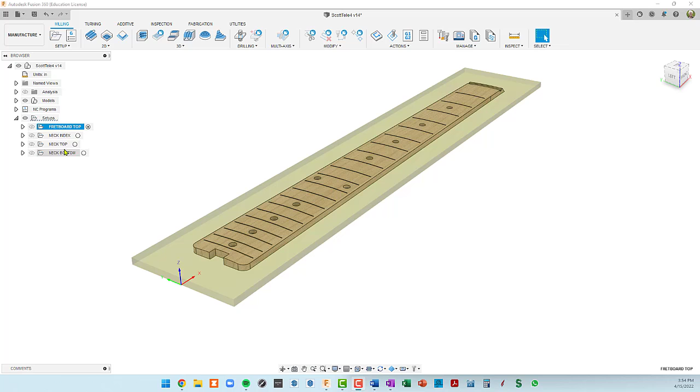So we're starting in the manufacture workspace. And in the last episode, we did this fretboard top tool pathing. I've added 3 more setups here, and let's review those new setups. So if I click here, I'm activating the setup. This is showing basically just a piece of stock with 2 index holes that are centered in the stock and 1 inch in from each side. So that's its own setup, basically just to drill these index holes.

Then we get into 2 more complicated setups where we're finishing off the headstock portion of the neck and doing the truss rod. And I believe I did the tuner holes on this side as well. And then we're going to do the neck bottom, which is going to finish this curvature part of the neck and the transitions to the headstock and heel. So pretty straightforward. Let's start with the index setup. So if I double click on that, we're going to edit it. And I'll basically go over the setup here.

So my stock box point in all of these setups is going to be the same. It's going to be the top of the stock and this point closest to me on my CNC. My long axis on my CNC is X and the short axis is Y. So I've configured my work coordinate system to match that. And what we're modeling here is basically just a piece of stock.

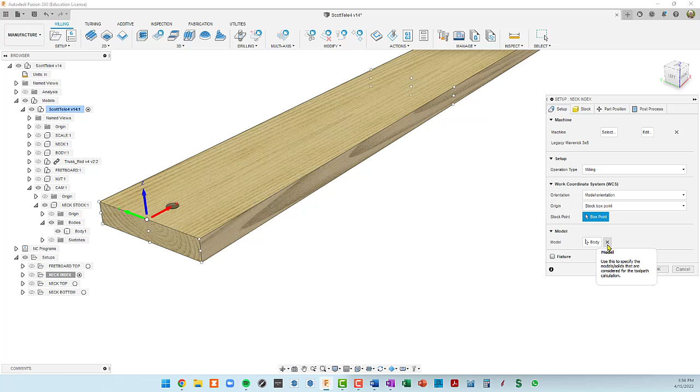So what I did was I went into my model, and here's a copy of the model, and I made a CAM component. And inside that CAM component, I made a neck stock component, and basically just made a 30 by 4 by 3/4 inch block, and that's this body right here. So when I'm selecting a model, what I'm modeling in this setup is just that piece of stock.

And so if we go back to the design side, I can show you. If we activate our CAM, I'm going to activate the neck. I think I've got another sketch on right here, which is probably the scale, so I'm going to hide that. And basically all I did was I made a sketch inside here to put these 2 holes in.

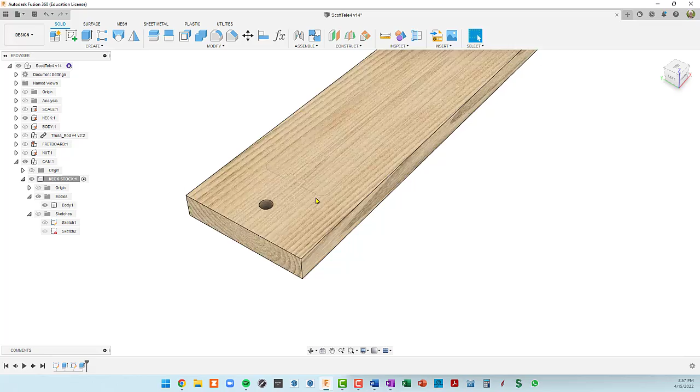So the holes are 3/8 of an inch because I use 3/8 of an inch wooden dowels, and I use a 1/4 inch bit to bore these out. So since this is a 4-inch wide piece of stock, all I did was I came in 2 inches with a dimension here and 1 inch from the end and my 3/8 inch hole, and then extruded that from the sketch, and that's basically what we're using for the stock.

So when we go back into the manufacturing side, in this neck index setup, you'll see that what I picked here was this body, which is inside my neck stock component, and that's going to be what we're going to model in this very quick setup. The stock here, I'm actually using the same body for the stock. So I pick from solid, which means you're actually picking it out of the model, and then I pick this same body. So you can see here it's 30 inches long, it's 4 inches wide, and it's 3/4 of an inch thick.

Okay, so let me collapse this model down. All we need to do within this setup is a single toolpath. So let's go ahead and look at this toolpath. This is a boring toolpath. I set my feed rate to 40 inches a minute, which I think is plenty. It's a 3/8 inch hole, so I need a bit smaller than that. So I'm using a 1/4 inch flat end mill.

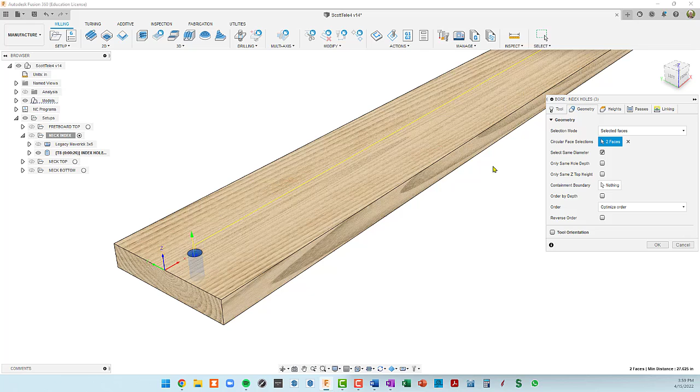The geometry selection, if I turn this off and I can reselect it, I'm just selecting the faces of this hole, like so. So you see the two faces here. This is kind of cool here too. If I only selected a single face right here, then I can turn on this check mark right here, and it says select same diameter.

It's going to automatically select the same diameter holes. So I've got a single face selected, but it looks for other holes of the same size. So if you had a bunch of holes, that's a nice little time saver.

So the heights, basically our top height, which is our cutting height, is going to be the top of the stock. The bottom height, which is the bottom of the cut, is going to be the stock bottom. But I want to go a little bit farther, so I went negative 5 thousandths. So this blue bottom goes a tiny bit beyond our stock, cutting into the spoil board a little bit, purposely, so that we cut all the way through it.

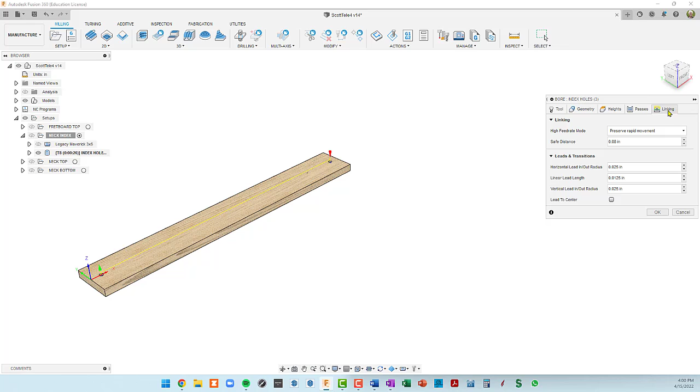Passes, I don't think I did anything here in the passes, and I didn't do anything in linking. So let's do an OK, and then we will simulate this toolpath, and it's probably on pretty fast here. Let me slow it down a little bit.

Okay, so now you can see it boring down through this hole. And if we get a side view right here, you should be able to see the tool extend just a tiny bit beyond the stock. I'll pick up the pace here a little bit.

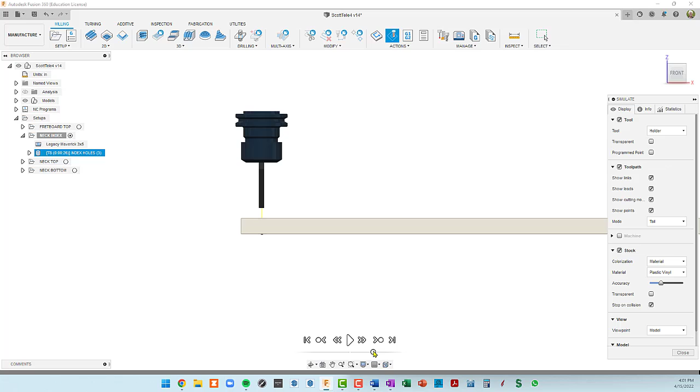Let's let it go to the other side. I'll pick up the pace a little bit. Here's the other hole. And yeah, it did actually bore a little bit through. That's the remainder of the tool path, the tail of the tool path going through the stock. So that's it. That's all that's in the first setup.

So now that the stock has these two holes drilled in it, I would position this on a separate spoil board, just a piece of MDF that also has the exact same two holes, and then put my wooden dowels in. This is going to fix this position on the CNC, and when we flip it, it'll also be perfectly centered. That's why with these center holes, we want to use a work coordinate system that is centered on the stock.

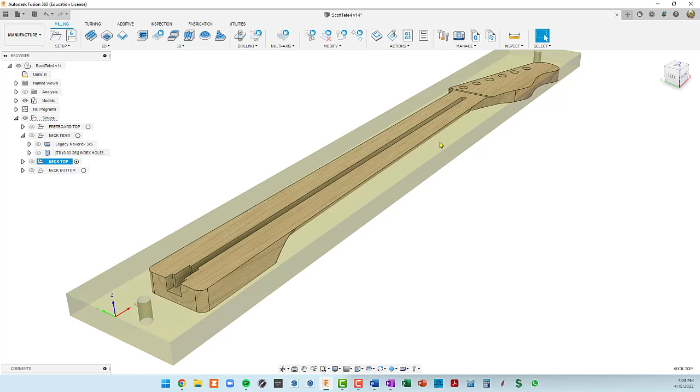Okay, so I'm going to go to the next setup, which is the neck top. I'm going to activate that setup and hide the index hole toolpath. You can see that we're using the same work coordinate system, so we're going to touch off the top of the stock for our Z. You can also see our dowels in the stock and the neck model inside the stock. So let's go ahead and open this up, and you can see there's 3, 4, 5, 6 different toolpaths in here.

I'm going to go ahead and simulate all the toolpaths, which I can do by selecting the setup and then going to simulate. I'm going to go to comparison here instead of material. In comparison, any green surface is finished, any blue surface has remaining stock, and anything in red we've overcut. In this case, you can see the headstock is buried somewhere inside the stock.

But the top of the neck, where the fretboard would be glued on, has not been... it is already finished because we're starting with a 3/4 inch piece of stock, but the truss rod slot has to be cut.

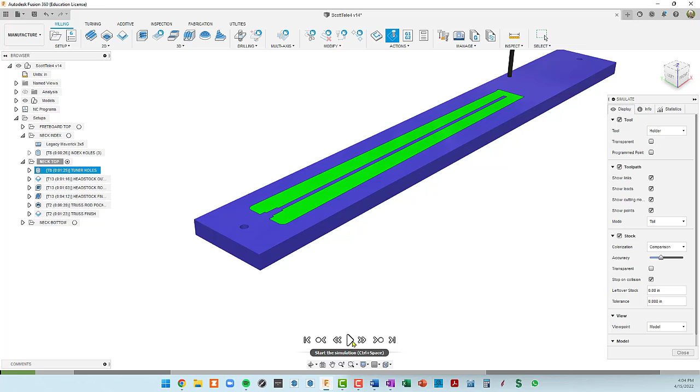Okay, so let's go ahead, and I think looks like the first operation are the tuner holes. So that's going all the way down through.

Now this is an outline of the headstock, which is basically just cut down to where we're going to reduce this headstock down to. Then a roughing operation, which is cutting out just the headstock material almost down to where it should be, but leaving a little bit so we can get it in a finished toolpath. This roughing operation is also going to show a step up, a transition to the top of the neck. Right here you can see the steps coming in.

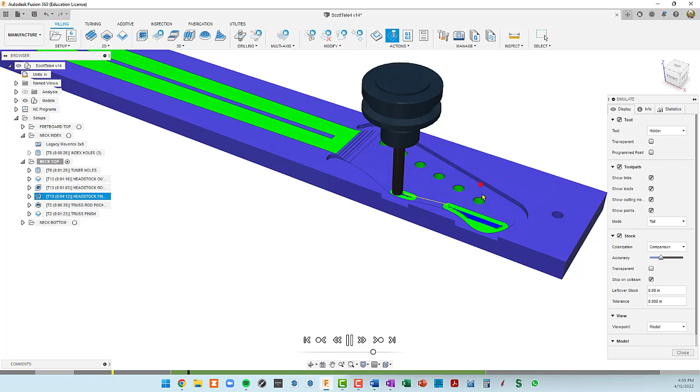Now it's going to the next toolpath, which is actually a parallel finishing toolpath with a ball nose. And now it is finishing. I'm not sure, that actually isn't a ball nose, but I'll go into why we can get away using a flat end mill here when we analyze that toolpath. But you can see it's now doing the transition step up to the top of the neck.

Notice it's not dipping down to the tuner holes, and there's a little trick to prevent that, which I'll go over. Let's pick up speed a little bit here.

Finish the smoothing operation on the headstock. And now with a smaller bit, I should slow this down a little bit.

Very quickly doing our truss rod slot. There's actually two operations here: we're doing a truss rod pocket operation and then a finishing operation using a contour. I'll go into why there appear to be two duplicate toolpaths here.

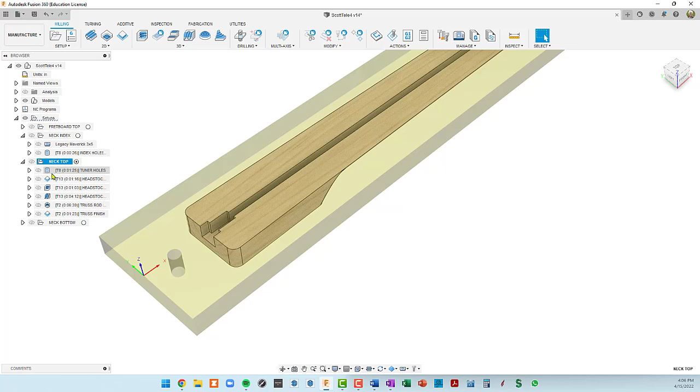Okay, let's start by analyzing our first toolpath, which is the tuner holes. This is pretty simple - it's going to be a boring toolpath, a 2D bore. Basically all we have to do is pick these holes.

Now it looks like we don't have any holes here, and actually that's the trick I used so that when we're finishing the top of the headstock, the tool will not dip down into these holes. I actually patched these surfaces and they're separate bodies. So I'm going to go into the model, and in the neck, if I open that up, we've got some extra bodies here that are all surface bodies. For the time being, I'm going to hide those six, and now our tuner holes open back up again.

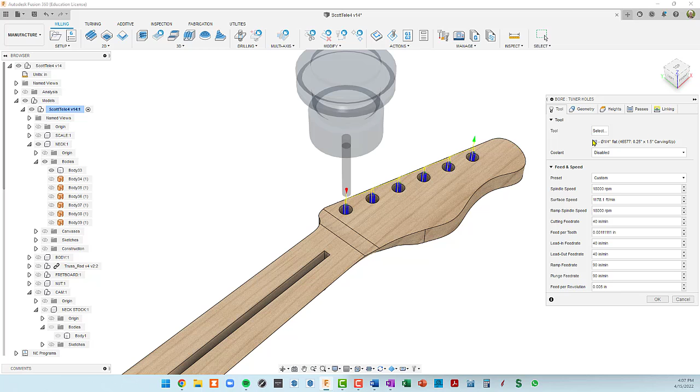So backing up here, our selection of a tool was a 1/4 inch flat end mill to fit inside this hole. I think it's a 10mm hole - let me check it. See what that is. That is 0.394, which I think is 10mm.

The visibility came back here of our patched hole tops, so I'm going to hide that again. Okay, back in our toolpaths, going back to our tuner holes. You can see the boring operation is spiraling down into the hole. I've got a 1/4 inch bit here, and a 40 inch per minute cutting rate.

If we go to the geometry, remember this select same diameter - basically all you have to do is select one face, turn this on, and all 6 of them are selected. Okay, so if we go to our heights, I've actually got the stock top selected for our height. Now you might think, well, why don't we just select this reduced surface on our headstock? That hasn't been cut yet.

So we literally do want our stock top to start our cut, the top height. And then the bottom is the stock bottom, and we went beyond 5 thousandths - same thing we did when cutting the index holes, just to make sure we get a clean cut on the back side.

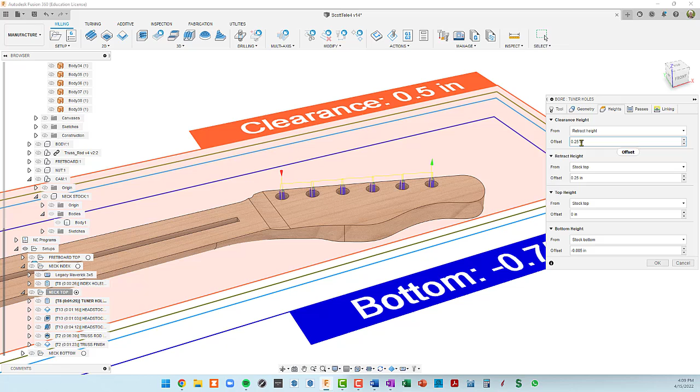Okay, let's see, our clearance height. Looks like there's an issue here. Let's see if I do an okay. Yeah, okay - clearance height, feed height reference. Let's just set this - I don't know how this got changed, but I'm going to set this to retract height, an offset of 1/4 inch, which is what it normally is.

Okay, passes - I didn't do anything in this boring operation. And so that's it, you can see the tool path spiraling down there. Let's go ahead and simulate that.

It's probably going a little fast here, but we can see the last two. And if we turn this on its side and play that again, we should be able to see the bit go just a little bit through, which we're seeing. Okay, so I'm going to close that.

So once that's done, we should see green in those holes. And I think we did - let me just confirm that. We'll run this simulation one more time.

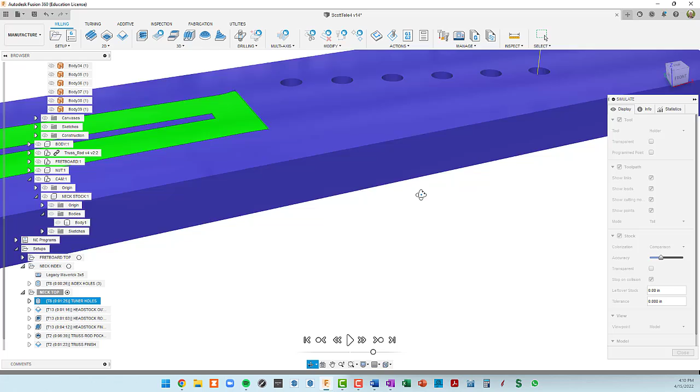So we're seeing something interesting here. We're seeing green inside the hole a little bit down, but this blue ring here is going to get cut out when we reduce the depth of the headstock. So that's why it's showing blue and green. If we looked at it from below, we'd see these green holes. Okay, so that's our first toolpath on the neck top.

Let's go to the second one, and this is a headstock roughing. By the way, if you don't see everything that's in this browser, you can just pull this sideways until nothing's getting truncated here. So this is my headstock outline - this is not the roughing. Let's simulate that alone and then go ahead and analyze it.

So here's the simulation. It's taking a 3/8 inch flat end mill and cutting around the profile of the headstock, but it's still leaving some material on the sides, so it's not doing the finished cut here. The purpose of this is to give the next toolpath room to operate when it reduces this headstock top down, so that it won't collide with our stock when it gets towards the edge.

So, pretty simple toolpath - let's look at that. Double click to edit it. So we're using a 3/8 inch flat end mill. This is at 80 inches per minute. So let's take a look at the geometry - basically we want to cut around the perimeter of this headstock and stop before we start with the neck.

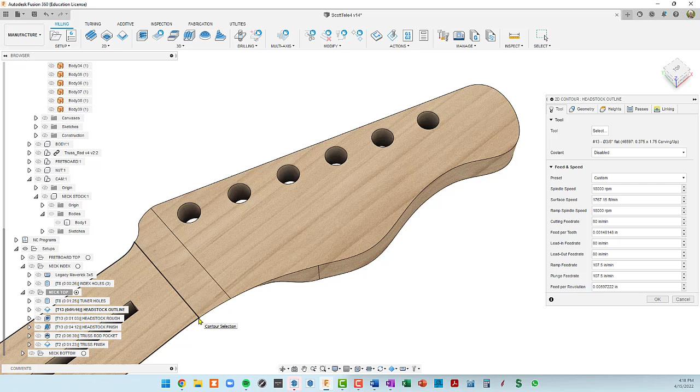So if we look at geometry, you can see that it's an open contour. It goes around and stops right here at the start of the flat portion of the neck. Okay, let's see how that was selected.

We want selected contours here. I'm going to delete the chain. Now if I just click here, that's a good start. If I click here, it's going around the whole neck, which is not what I want. So I'm going to delete that chain.

So what I did was I clicked here, and then alt-clicked on it. And you get this little thing where you can kind of build your own contour. We want an open contour, so that's selected.

Now I want to click on all of these sections that I want a continuous contour for. You can see they turn a light blue, a little bit difficult to see, but let me try to select that one again. Okay, that's selected, and that's selected.

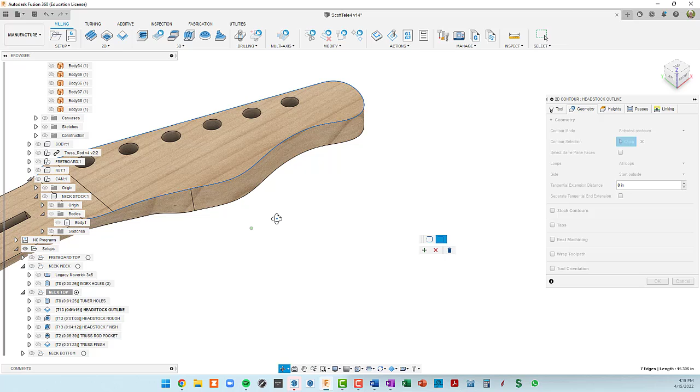So now that all of those continuous contours are selected, and keep in mind it's open because we don't want the bit to come across and slice our neck up, I'm going to press this plus button, which accepts the contour. Now you can see that it matches the one that I deleted previously. Our line is on the outside boundary, so that's good.

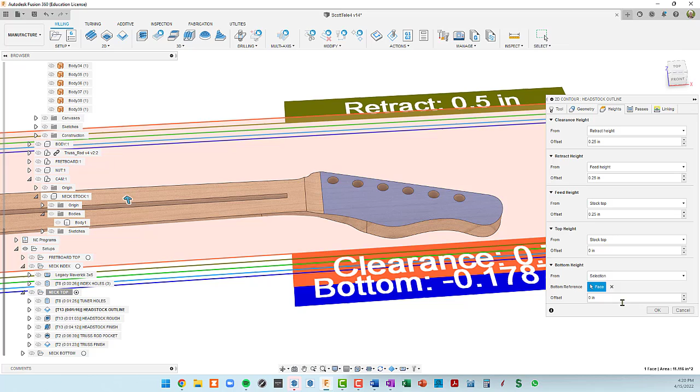So now let's look at our heights. Basically the bottom of this cutaway in the headstock is where I want to take that outside contour down to. So we're starting at stock top and going down to a selection, and the selection is this face. Now since this is a roughing pass, let's see, did I leave any extra?

I did leave 20 thousandths radially on the walls, basically. Let's just go ahead and do an OK and see what that toolpath does.

Since this is a contour, this is cutting with the full width of this bit. I mean, it's a 3/8 inch bit, but still I don't want to cut more than half the diameter of that bit in any one pass. So you can see there was a couple passes there. Let's go in and take a look at that toolpath and see how that was done.

I just did multiple depths here, and I set this to, I guess that is half of 3/8. So that's, I believe, 3/16, 0.1875.

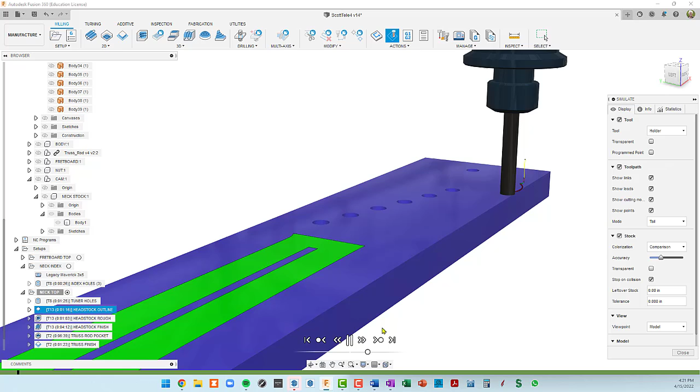So that's how the multiple depths was derived. And now that we look at the toolpath, we can see that we do have multiple depths here. And it's also ramping down. So let's play that again with that in mind. You can see the tool's getting a little deeper as it ramps down.

Stops right there near the side of the neck. Let me pick up speed a little bit here. And it's traveling in 2 directions, which is another check mark inside these dialog boxes.

Okay, so that's done. Basically, the reason for that is now we have kind of a safe area when we're hogging out all this material in the headstock, where the tool, when it gets to the edge, it's not going to collide with the stock.

So the next thing we're going to do is the actual roughing out of this area. Let's simulate that. You can kind of see what it's going to do is bore down and then in a circular motion do an adaptive clearing.

Let's play that a little fast here. You can see it's cutting with the side of the bit, which is an adaptive clearing. And it's leaving a little bit of stock for the finishing operation, but hogging out most of this headstock.

And then once it finishes, it's going to actually do this step-up transition to the neck right there. So that's the end of the roughing toolpath.

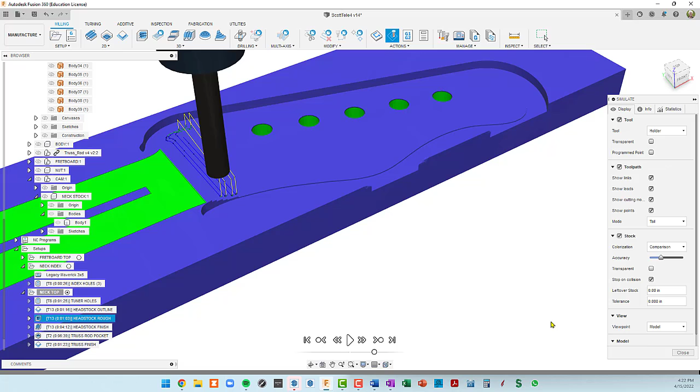So let's edit it, take a look at the settings in there. We're starting with a 3/8 inch flat end mill. The geometry is the same machining boundary, but it's a closed profile now.

So I did the same thing to make this, a very similar thing. Let me turn this off and do it again. So we're going to start with this. Just clicking here, even clicking here is not going to add, it's going to add too much to that machining boundary. So we're going to click here and then hold down Alt and click on the red toolpath.

This time we want a closed contour. So we've got a section of it selected. I'm going to click here. Did I get it? There it is. Right here, we're going to come across.

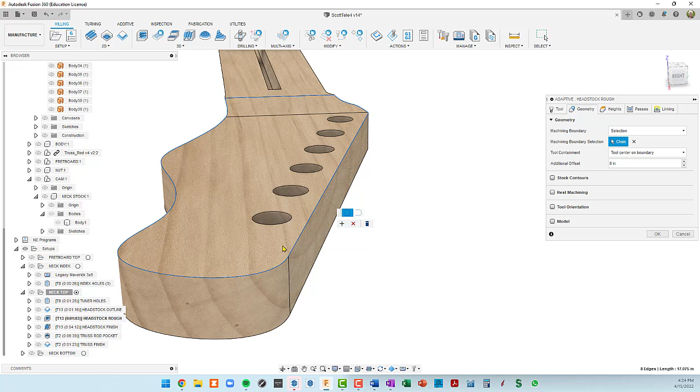And there should be, I think, 3 pieces here to get. Yep, got it. Very difficult to see this. I wish they would make this a little bit thicker, this blue selection. But I think we got it. So we're going to hit plus to accept it. And then you can see we've got this kind of greenish contour that basically defines exactly what we want to cut here. So I think that's all we need to do in geometry.

The heights. So we're going to cut from our stock top down to this selection, this face, the same way we did in the perimeter cut that we did previously. Now let's see, since this is a roughing operation, we do want to leave on the floor our axial stock to leave 20 thousandths. And that's basically all I did there.

Okay, so we'll simulate it one last time. So our 3/8" end mill is spiraling down, helixing down, then doing its side cutting, and you can see it has no problem going beyond the geometry because it's been cut away. And so that is our roughing operation.

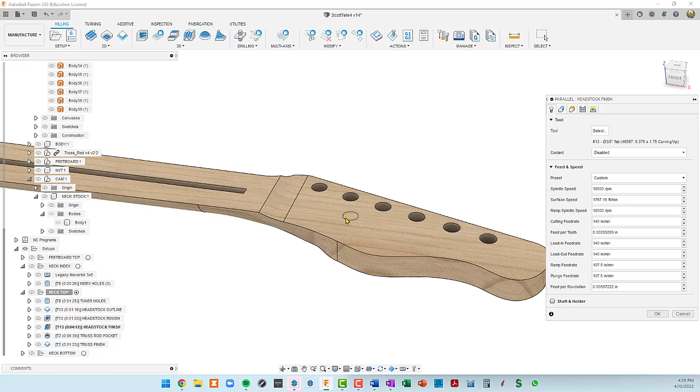Okay, so next up we're going to go to our finish headstock operation. Now, I originally said that this was a ball end mill, but it's actually an end mill. So we picked the same tool we've been using, this 3/8" flat. The reason we can get away with this on a finishing operation is we are going to use a parallel toolpath and step straight up on this transition. And when we do this, the end mill's sort of acting like a ball end. So with a straight parallel, and we're perpendicular to this line here, we can get away with that.

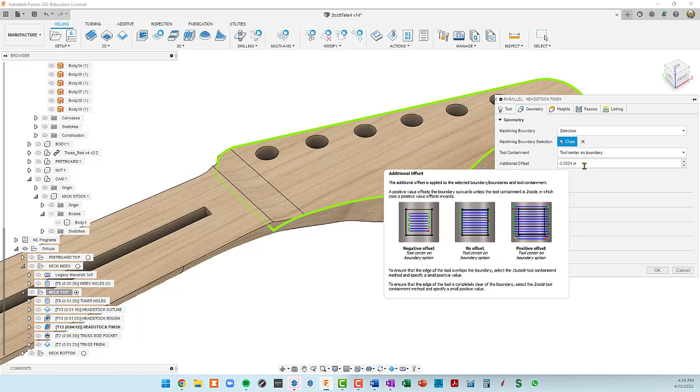So we've got our tool selected. Since this isn't cutting much, I'm going to go at 540 inches per minute on this finishing operation. Let me pull this out a little bit. Let's go to geometry. Same thing here. Selected the machining boundary. I'm not going to go into that again, but same as we did it in the roughing operation. Now, this is something that I learned in somebody else's video recently. This defaults to 0. Okay.

Now, I'm going to go ahead and show you the problem with this toolpath. And I didn't see the problem until I actually cut this yesterday, and the bit just dove straight down through this stock. You can see these two lines here. Very troubling. I think it actually moved the bit inside the collet a little bit too, and kind of screwed up the finishing of this top. So when I simulate this, watch this. So here's our finished toolpath. And you're going to see the problem here in a second, right over here in this area.

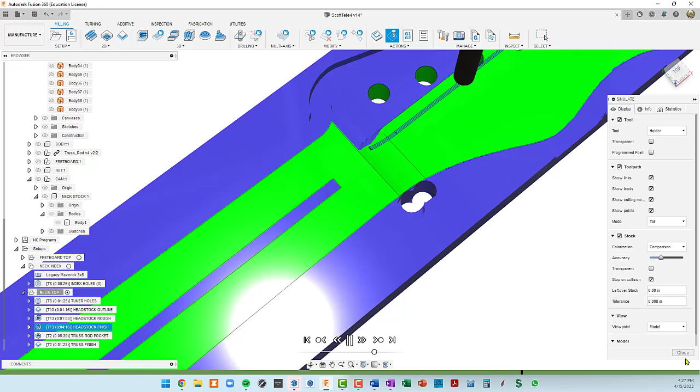You see the holes that it cut all the way through the stock, and it just plunged down there really quickly. And the other weird thing is Fusion's not reporting a collision with stock. That is certainly a rapid collision with stock. So it's as if Fusion didn't know that it was doing that on the toolpath. There is a fix for that, and I will show you that. So I'm not going to watch this finish. So we can see the problem right here. See how it's dipping just straight down through the entire stock.

Okay, so I don't totally understand this, but I can show you how to fix it. In passes, there is a setting called tolerance that's set to 0.4 thousandths, 0.0004 inches, tiny amount. Something about Fusion will translate the model into an STL model, which is like a triangular mesh type model. And this is the tolerance that it uses to do that. And I guess it gets screwed up sometimes, just creating extra crap on your toolpath.

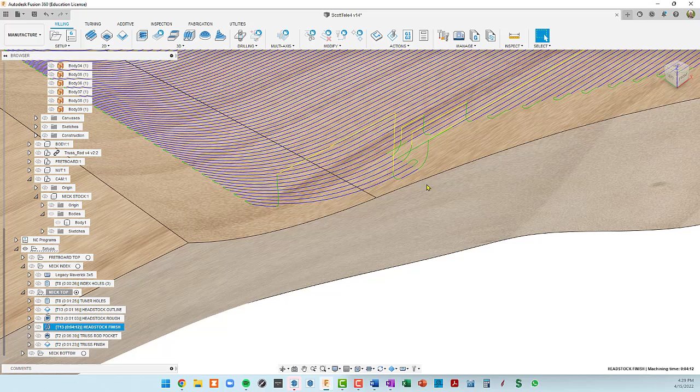So if you go into geometry and set this additional offset to the negative value of whatever this is, so if you put in negative 0.0004 right here, and let's go ahead and generate the toolpath again. Magically, that big dive down is gone. It's just eliminated. I don't know why Fusion doesn't do that automatically. You would think it would. But anyway, so that solves the problem.

Let's look at one other thing here. By default, this is probably turned off, this contact point boundary. So let's go ahead and show the toolpath without that. And let's see if this bit is getting up all the way onto the top of the neck with its transition here. So I'll speed it up a little bit. It actually is doing that.

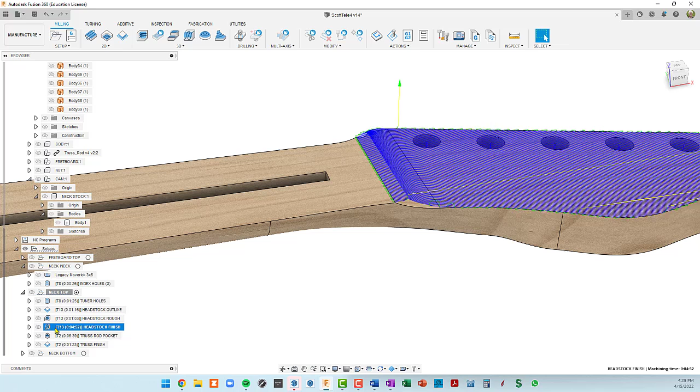So if this wasn't finished all the way up, generally this setting will fix that. You know what? I guess you don't need it with the flat end mill, but with a ball nose bit, you definitely would need this turned on. So I'm going to turn that off because I don't need it with this mill. Okay, so heights. Pretty much the same as what we did on the previous. We've got our stock top.

This is interesting. We really don't have to go from the stock top, but I think Fusion's kind of figuring out where to start here. And same thing with our model bottom. We're obviously not cutting to the model bottom, but Fusion's doing the right thing. Passes: we don't need multiple depths because this is a finishing pass and there's very little to cut. But in direction, we are going in both ways here.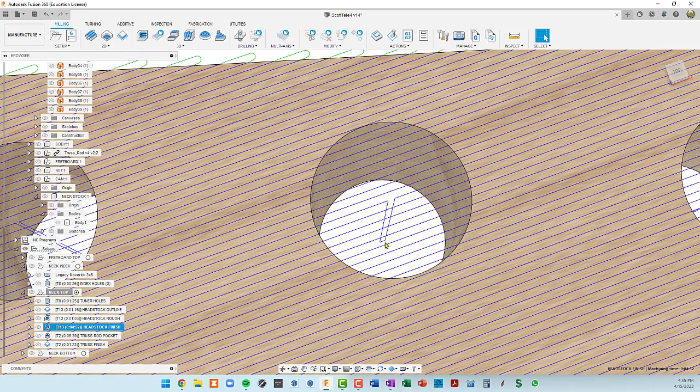Okay, so let's just simulate this entire finishing toolpath. Okay, so there's actually a problem here. It's kind of hard to see in the simulation, but if we get out of the simulation, we can zoom in on the toolpaths, and you can see how the bit wants to dive down. When it gets to the very middle of the hole, it can actually get that 3/8" bit down into the hole. So it's going to do that and probably scar the outside of the hole while doing it, and certainly mess up this nice, clean, parallel toolpath that it's doing.

So how do we prevent that? That's where these bodies come in. So if we go to our headstock finishing, and in our geometry, go down to model, we want to add some surfaces to the model. So these are the surfaces that we want to add, and I'll show you how I created those.

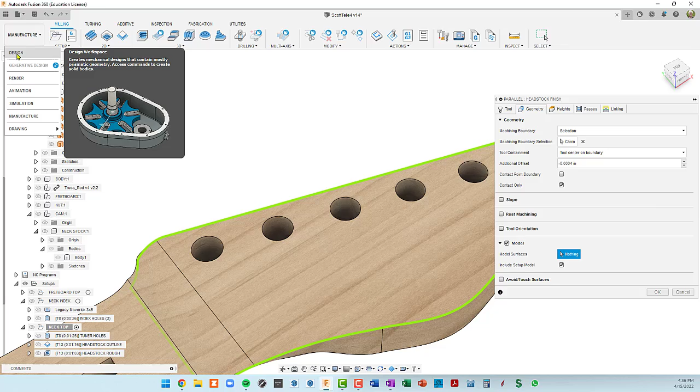Back in the design side, we're in the neck stock right now. Let's go to the neck, activate that, and I've already made these bodies, but I'll show you how I did it. Oops, I'm in body. Okay, here's the neck. These bodies right here, basically, all I did was I came into the surface environment and did a patch. So I've created a body.

Let me delete one of these guys. I'll delete this one. Okay. So now I've got a hole. Looks like I deleted them all for some reason. Oh, I guess they're hidden. Okay. Unhide. So I've got 5 of these. I'll show you how I made one of these.

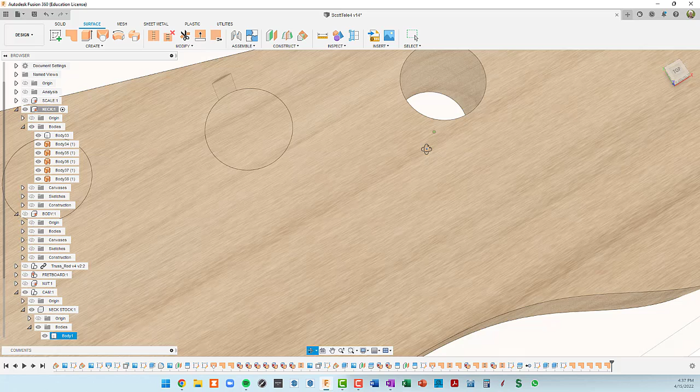So here's the hole, and I'm in surface. I go to patch, and then just click here, and that created a new body, and it's a surface body, not a solid body. So it's just a planar surface right there. But that's enough to stop the bit from going in there. So we've got our 6 bodies, which are these patches. So let's go back to the manufacturing environment.

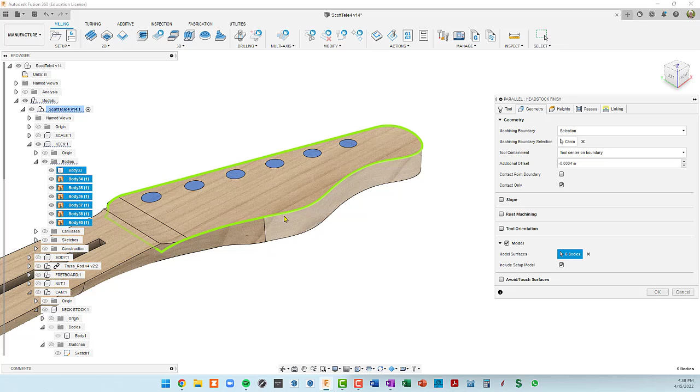Let me collapse the model down here. So we are in our neck top, and we are doing our finish operation on the headstock. And if we go into geometry, in model, we can actually add these surfaces. So let's open up our model again. I'm clicking and shift clicking here. See how I have 6 bodies here in the dialog box? These are now part of the model.

So now that they are, and that toolpath gets regenerated, when we zoom in here, we no longer see the dip into the hole because the hole has been patched. Okay, so let's simulate again, make sure we've got everything now. Okay, so that's our finished headstock. This is just the tail of our toolpath, this blue, but we can see underlying that is all green. So our headstock is finished. So let's close that toolpath.

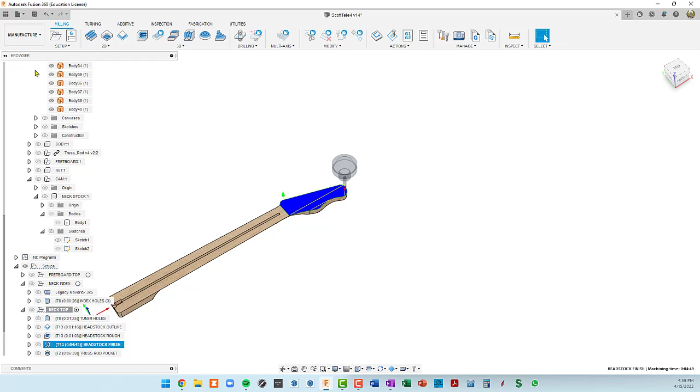So we have 2 more toolpaths here. Let me collapse the model down. And we've got a truss rod pocket operation. So let's simulate that. We've got a 1/8" bit here, and it is basically cutting everything in that pocket. We were using a spoke wheel on this particular Telecaster, and you can see that the bottom of this slot is the same for the double action truss rod, this barrel of the spoke, and this spoke itself.

If I go into the model, let me go ahead and turn that on temporarily just so you can see it. Let's see, there's our truss rod right here. Close here. Truss rod. Oh, our components are all hidden in the truss rod. Okay, so that's the spoke and the barrel, and this is our StewMac double action truss rod. So I'm going to hide that. Okay.

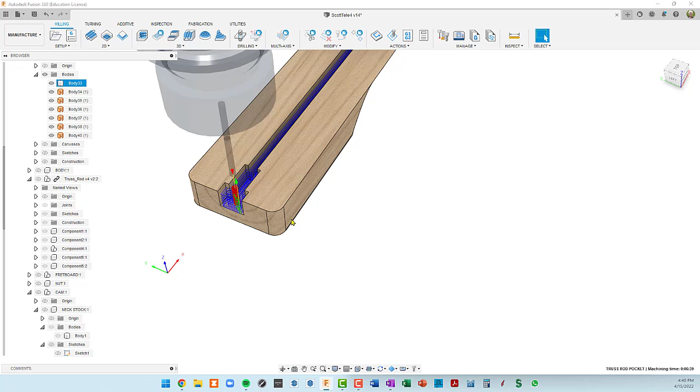So collapsing the model down again and looking at our toolpath here. So nothing fancy here. This is a pocketing toolpath. We've got a 1/8 inch flat end mill. The geometry was really easy to select. I'll select it again. All I did was hover over this surface right here, and it selected the entire thing.

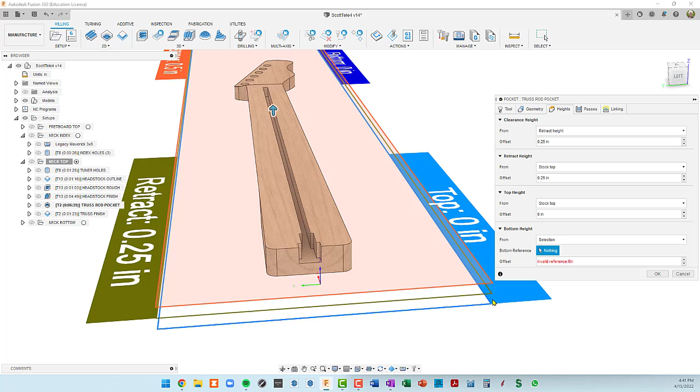Then heights, it went from stock top down to model bottom, but actually we can just say down to selection. No, down to contour. No. Okay, we'll do selection and then we'll actually click on that. So down to this face is where it's going to cut. Passes, we definitely want multiple passes on this 1/8 of an inch bit.

So where's that? Let's see. So we have a maximum roughing step down that is going to control our passes. So I've got that set to 0.0625. And I think that's all I did. So let's go ahead and click OK. We will simulate this toolpath.

And you notice I didn't do any stock to leave. So there's no stock to leave on the sides and no stock to leave on the bottom. My experience, at least with my CNC, is that means this truss rod will not fit. It's just too tight when I cut it exactly to spec. And it's not deep enough either. So because this was a multiple pass operation, you can see there's lots of little passes here. We're just kind of chipping away at it, maybe a 1/16 of an inch at a time.

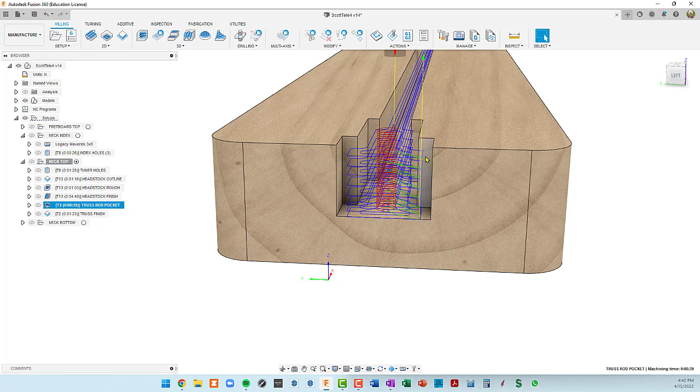So when we cut this a second time, I want to cut it twice because I want to test and see, maybe it'll fit if we cut it to spec. But my experience is it's not going to. So now there's another toolpath. This is actually a different toolpath. This is actually a contour. So basically it uses the same geometry here, but it's going to come all the way down with a single pass and then just cut the sidewalls.

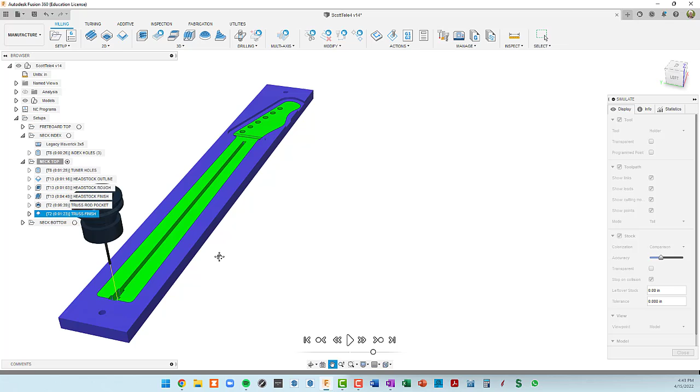Okay, so if this wasn't set, let's turn stock to leave off temporarily. And go ahead and simulate. So now, oops, a little too fast. You can see, where's it coming in? Okay, so it's coming in here. And it's ramping down. But as soon as it ramps down, pick up a little speed here, then it starts cutting at full depth. And it's just once around once it's at full depth, and then it comes back out. So, since that's also set to the same slot, it's not cutting anything.

What we want to do is come in here and turn stock to leave into something negative. So here's my stock to leave, and I've got, oh, it reset. That's unfortunate. See if I can remember what it was set to. I wonder if I can undo that. So I'm going to do an undo. And I'm going to double click here, come in. Okay, this is what it was set to.

I had stock to leave turned on, radial, which means the walls are negative 0.0025. My experience on my machine anyway is if I overcut something by 5 thousandths, so 0.005, that gives me enough clearance to get the piece in. But if I'm cutting on two sides, which we are here, I want to cut that tolerance in half. So that's why I've got negative 0.0025, half of my 5 thousandths. So basically 2.5 thousandths on each side. And I do my 5 thousandths, the full amount, on the floor because I'm only cutting one surface there.

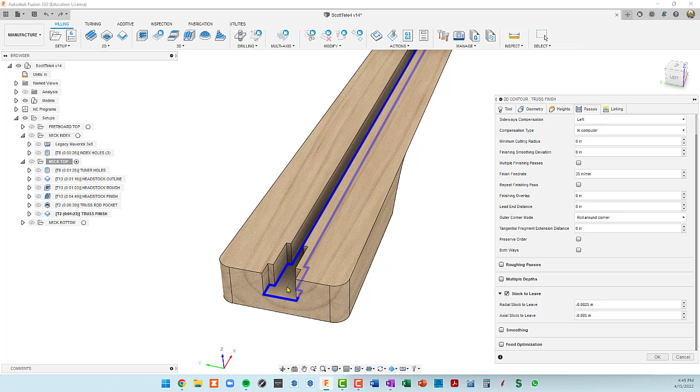Okay, so that's all that does, is it takes another swipe. And now if we simulate that, we should see that this actually goes red because it's cutting beyond the model. But there's so little that it's cutting, I'm not sure we are going to see red. We actually don't. So one thing you could do here, to make sure that the negative is going in the direction you want it to go in, is you could come in here, go to your stock to leave, and I'm just going to add a 1 in front of this and a 1 in front of this, and then we'll come back and we'll get rid of those.

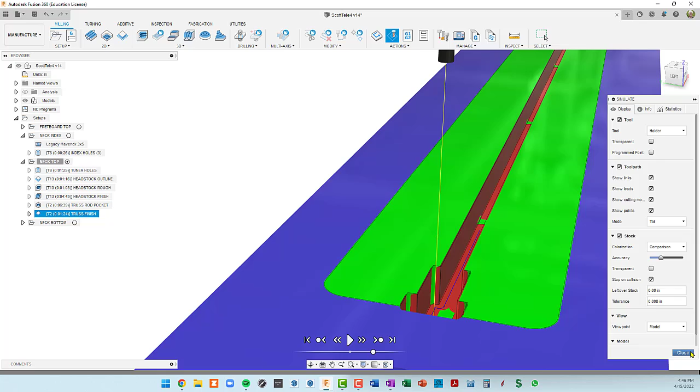Okay, so now when we simulate, we should see red being exposed when we cut the sides. And there we go. We are seeing it. And we should see red on the bottom too. And we do. Okay. All right, so I'm going to undo that. I'm going to do a Control Z. Hopefully that sets things back.

We'll simulate one more time. And we shouldn't see any red here, even though we are overcutting a little bit. We're overcutting so little that it's not showing up. So when I run this, it is cutting a little bit, but it still looks like it's green.

I bet you if we cranked up our accuracy here, we would see it, but it really slows down the toolpath generation, so I'm not going to do that. But I will take one more swipe at this, go over to our passes, and yeah, that's what we had it set to. Okay, so that is our neck top.

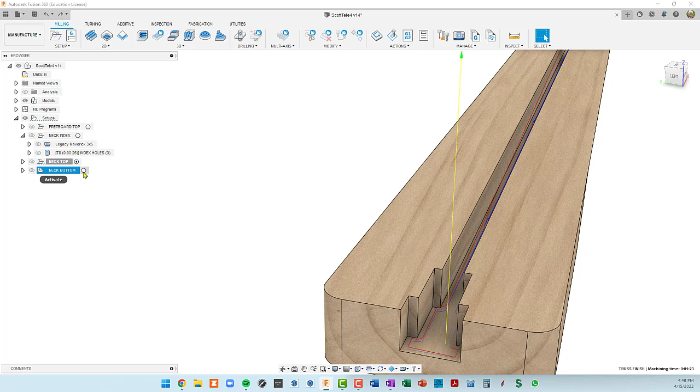Okay, so I'm going to collapse up this setup, and I'm going to activate our neck bottom setup. And now you see that the piece flipped over, which is nice. This is how we're cutting it. You might wonder how you get the piece to flip over. The way I do that is I go up to named views, and let's say our view was this way, which is the same as what we were looking at. All you'd have to do is flip the piece over manually, just orbiting around here.

And then what I did was I went right click, I did a new named view, I updated the view, I called it CNC bottom. This is the view from the side of the CNC that I stand on. And then when you right click on your setup, you can go to associated named views and pick CNC bottom. So once that's part of your setup, then when you go back and forth between these setups, the part will flip by itself, which is nice.

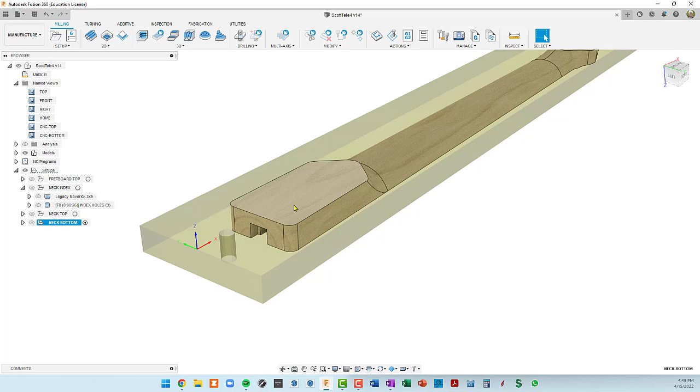Okay, now you'll notice that I am Z-zeroing off the top of this. The reason I could get away with this, and in other necks that weren't milled down to the exact thickness, you'd have to index off of the bottom here, off of the same spot. But as long as I know that this stock thickness is exact, this surface was not being cut. This one was not being cut. And on this side of the guitar, this was not being cut.

Those were all finished by taking a piece of stock and putting it through a planer and putting calipers on it and making sure that it's damn close to 3/4 of an inch. So it saves a lot of operations on the CNC. And the planer, I think, my planer anyway, gives me a better finish here.

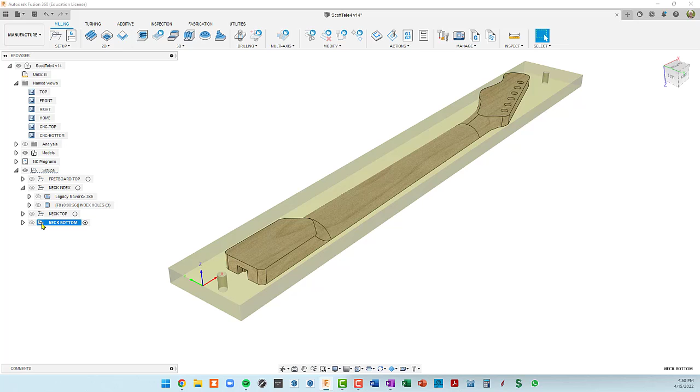If you were to do something that you wanted to do some thickness planing, say your stock started at 1 inch here, you could surface this and surface this with a planing mill. And then if you were doing that, you probably would want your work coordinate system on the bottom of the stock, which is essentially the same as the top of the neck.

So I can get away with kind of cheating here and leave my work coordinate system in the same spot on the top of this stock, and it was on the top of the stock here. I mean, technically it's not the same point, it's on the bottom, but relative to the view, it's in the same spot. Okay, so let's see, I'm going to double click.

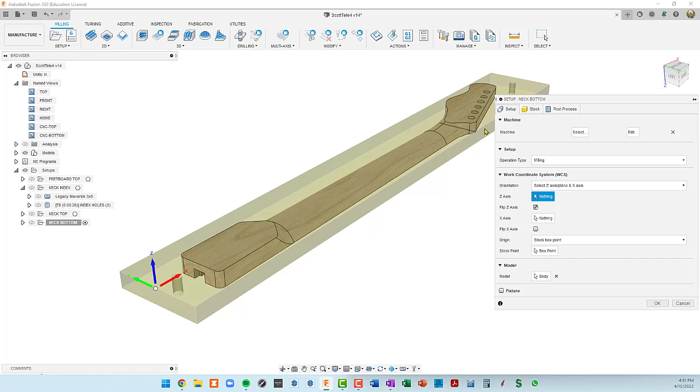Here's our setup. Nothing different. We're using the same model, the neck body, and we're using the same stock, which was a stock that we modeled inside the CAM component inside the model itself. If I open up the model, you know, we had this CAM component, and then I made a neck stock component inside there. So that's where this came from. Okay, so I'm going to cancel out of there, collapse the model down,

and let's open up our neck bottom. And you can see we only have 3 toolpaths here. Basically, the only sections we have to deal with are this, this, this, and this, and also cutting a perimeter all the way around the outside. So that's what we're going to start with. We're going to start with a profile here. Let me go ahead and run all the toolpaths.

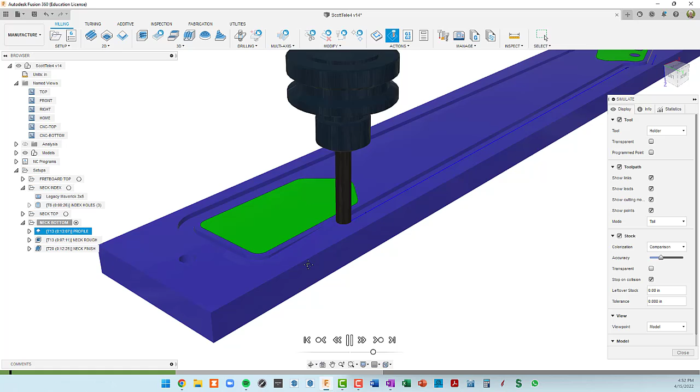And you can see these are essentially finished, not on the CNC. So this is a profile that's going to go all the way around the guitar. And I'm specifically cutting that first because then when we do our roughing operation in this area of the neck, the bit has somewhere to fall into when it's getting close to the edge.

So you can see that it's not cutting green here. It's leaving a little bit of stock, and in one of its finishing passes, it's going to cut down to green. Actually, in its finishing pass, just one of them. All right, let me pick up the speed a little bit here. Oop.

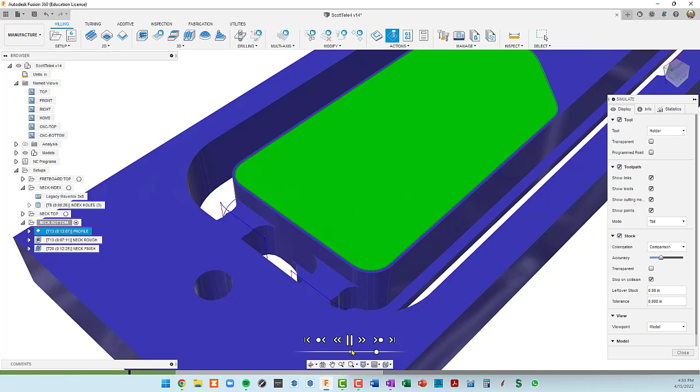Now, another thing you might see here is there's actually tabs that are getting exposed here. Now, the first time that I cut this neck, I was using tape, tape and no tabs. And what happened was, when the bit came around to this section right here, and because this blue area down here is already removed when we did the setup on the other side, I think the headstock was actually vibrating up and down because it had room to move.

And it was vibrating so much that I think it came up and it caught the edge of the bit and it actually ripped the tape off, and this came flying up and it got damaged. So the fix, even though it's still taped down the middle, I'm also going to leave tabs here and purposely put them here and on the end here. Big tab down here, and I'll show you how this big tab was created.

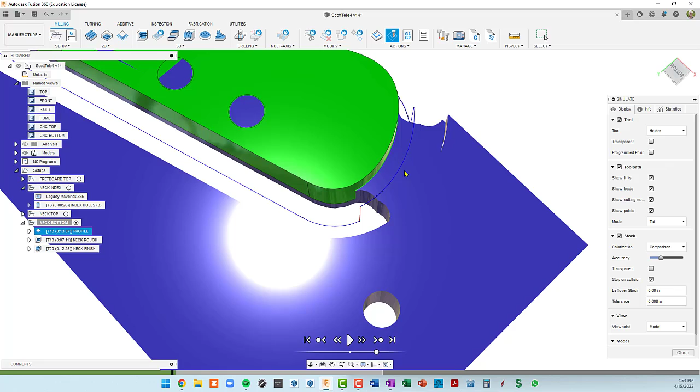So that secures this so that once this profile is cut, this headstock isn't going to move. And it still has to be taped down, but it's also attached to the main stock, which is clamped down. So it's kind of a dual approach, but certainly fixes the problem of the part flying off. So, all right, that's the profile. Let's continue through the next.

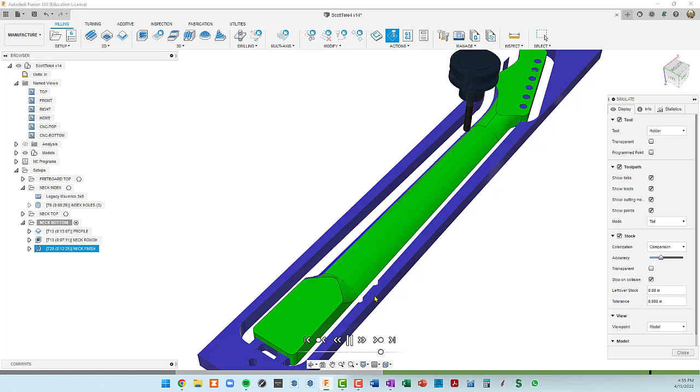This is a neck roughing, and you can see it's kind of stepping up towards the middle on both sides. You can see the steps here. I'll speed this up a little bit. It's doing another pass on the roughing. And then this is actually switching to a ball nose and doing the finishing here. And that's it. So then we would have to clean up these tabs once we're done here. All right, so those are the 3 toolpaths we're going to go over.

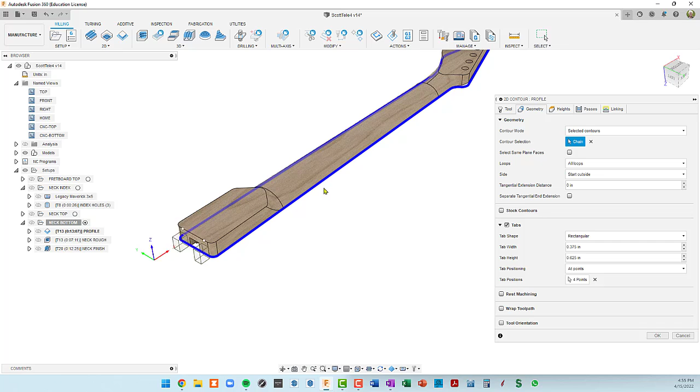So let's open up our profile toolpath. I am using a 3/8 inch flat end mill, and I'm going at 70 inches per minute. Since this is a profile, it's using the full width of this bit, so we don't want to push it too hard. So let's see, the geometry, I was able to get a single chain, and I don't think I did it this way. I could do it this way where, holding down this and using the Alt key, getting a chain all the way around.

But I have in the model something else I can use. If we open up the model, there is a sketch in the model, in the neck. Let's turn our sketches on, go down here. There's a profile right here. So that's very convenient. I can just select that profile, and that was created by projecting our geometry down to a bottom plane. So that's exactly what I want for the profile cut. I want to turn tabs on, and I want to select the points that I want my tabs in.

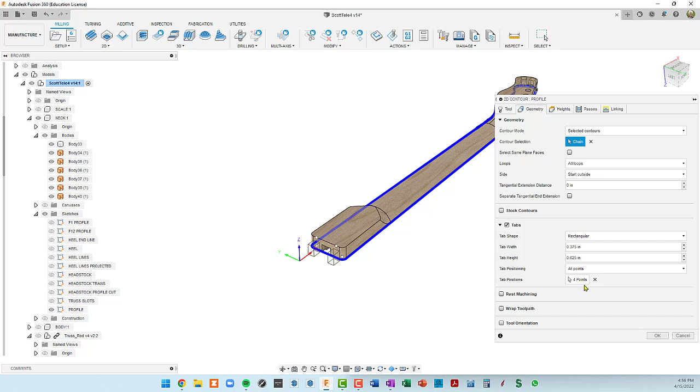Okay, so you'd probably notice that there are 3 tabs, and one of them was big. All the tabs generally are the same size, but what I did, if I turn these points off, I clicked here and here, and then at the end I clicked these 2 successive points, and this area isn't big enough for the 3/8 inch end mill to get in, so it made this one monster tab, which is good. I specifically want the tab on this curved part of the headstock because that'll be easier to sand down. I'll actually use a pattern bit on the router table. The bearing on the pattern bit will ride right here on this surface.

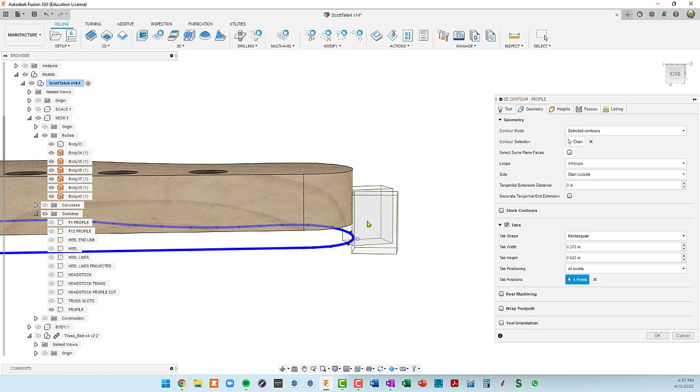Now, you may notice that these tabs are gigantic in height. The reason they are is because of this side, the headstock being reduced away already. So really the bottom part of these tabs really isn't going to be here. It's just from this surface right here on up. But Fusion is going to put the tabs at the bottom of our profile toolpath. Okay. And we're stuck with the same height, so we've got this height as well. And I guess you're probably asking, well, why does it go down far on this side?

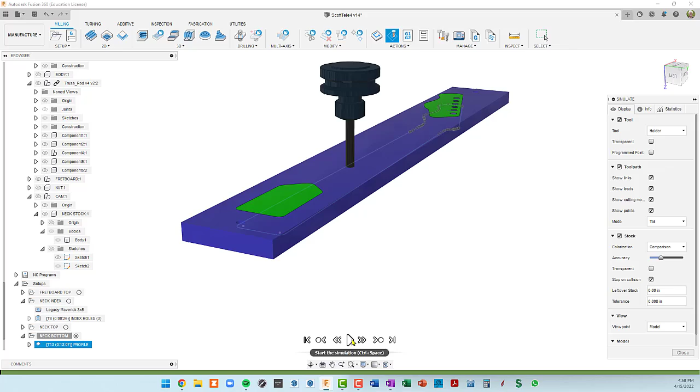The profile cut actually goes down into the spoil board quite a bit to create room for the roughing and finishing of this section of the neck. So let's take a look at that. I'm going to simulate this again, and you know what, let's look at it without the simulation. We can see how this went down below by a couple of passes, and we specifically want to cut into that. I've got an extra piece of MDF that I use that's got the holes to mount the stock in, so I'm cutting into this MDF that's actually attached to my real spoil board, so I'm not going that deep into my CNC spoil board.

So let's see how that's done. I'm going to open up the profile, and we've got our 3/8 inch tool. We selected our geometry, so in heights is how it was done. It went from stock top down to stock bottom minus 1/8 of an inch, cutting into our MDF fixture plate.

Passes, I do want roughing passes, and the maximum step over is 1/8 of an inch. Specifically I want that step over because we're going to come in with a big ball nose bit and do the finishing, so I want a wide trough here.

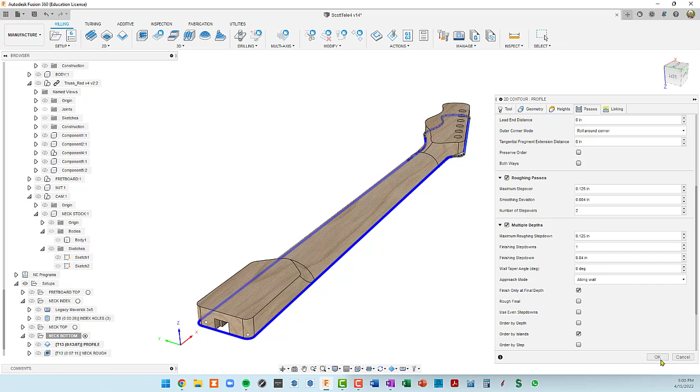We also want multiple step downs. Let's see, where's our step down here? Here's a step over in our passes. Somewhere there's a maximum step down. Oh okay, here it is, our multiple depths. This is our maximum roughing step down, which is 1/8 of an inch. So our contour is going to go 1/8 of an inch at a time.

Kind of conservative with this big bit, but when you have a part fly off, you generally get conservative. So you can see we're taking multiple horizontal paths and multiple vertical paths.

In the end, let's see if I can back this up a little bit. In the end, it's taking a single finishing pass at full depth and exposing the green.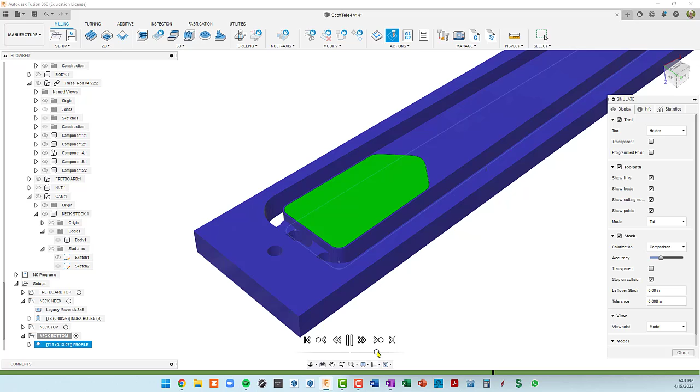Let me slow that down, do that again. Try to slow it down right before the finishing pass. So it should be coming up next. Nope, not quite, see how it's cutting our tabs.

Let's see if this is going to be the finishing pass. So we're at full depth now, and we should see green as it comes around the heel. No, not yet. Okay, here's our final pass right here. No.

Let's speed it up a little bit. Still not our final roughing pass. Oh, you know why? Because it's over. Yeah, I didn't realize that it's doing that extra 1/8 of an inch depth. Sorry, let's see if I can do this again and speed it up.

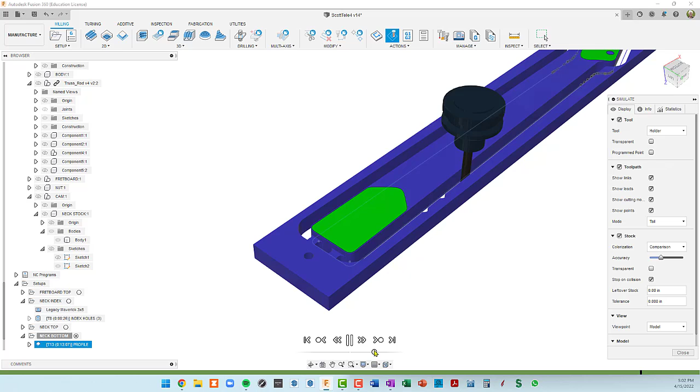Okay, so now I'm going to start slowing it down a little bit. There's our final pass. That is our finishing pass. It's at full depth and it's finishing off the side. So that yields a nice finish.

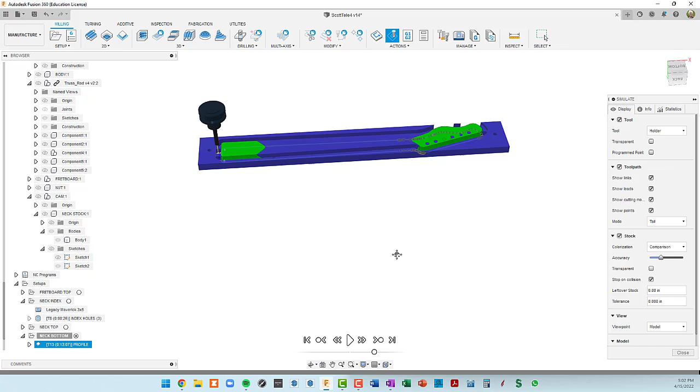Our tabs are down in the heel. This is not going to be exposed anyway, that'll be inside the body, so that's in a good spot. And our gigantic tab here is in a good spot so that we can use a router table to finish that, and then do any kind of sanding on a drum sander to finish that off. Okay, so that was our profile.

So that's creating an area for the next 2 toolpaths to operate in. Let's collapse the model down and take a look at our last 2 toolpaths. Okay, so the first one here is a neck roughing. We're going to stay with our 3/8 inch flat end mill.

Geometry, this is an adaptive, a 3D adaptive toolpath, so it kind of figures out everything it needs to cut. All you need to do is say okay, stay within this boundary, so that's what this machining boundary is. I use the same sketch, the profile sketch in the neck, to be able to select this perimeter in one shot.

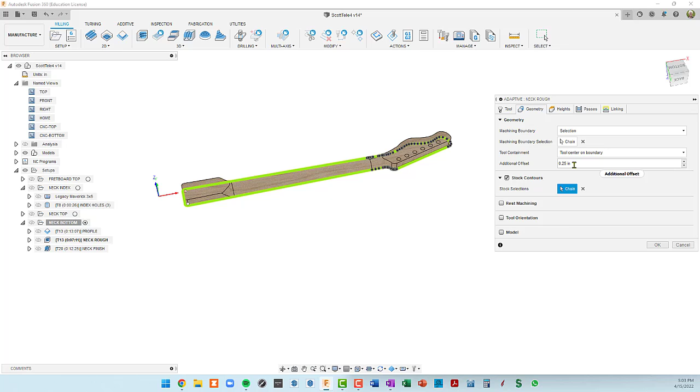Let's see, we have stock contours turned on. If I click on that, that's actually the same chain around the outside. And we have an additional offset of 1/4 of an inch so that I want — well, let me turn that off and we can see what happens. So let's go ahead and generate that.

All right, so still generating. Okay, so we are now simulating — oops, not sure what happened there. Let's go back. Okay, here's our neck roughing. Simulate.

All right, so let's speed that up and see what we get. So this is our roughing pass. And the problem was, if I didn't tell it to go an additional offset, it really wasn't roughing down very far in the curvature of the neck here.

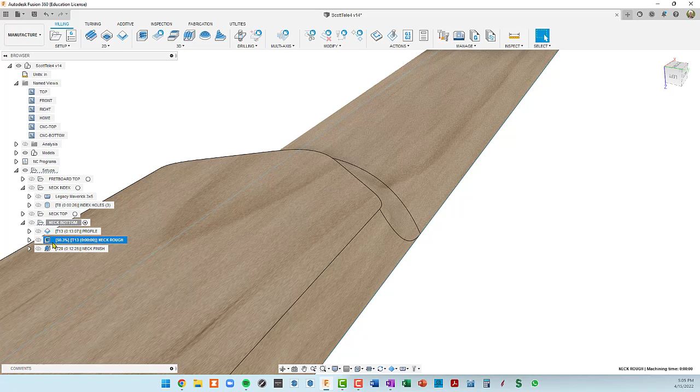So to fix that, I added an additional offset here of 1/4 of an inch, which seems like a lot, but that got me roughed all the way down to the sides. So you can kind of see it here in the toolpath, see how it's coming down here. So we'll simulate that.

So the tool is definitely working at least somewhat outside the boundary. I don't know if I have the tool on center. Let's take a look at that.

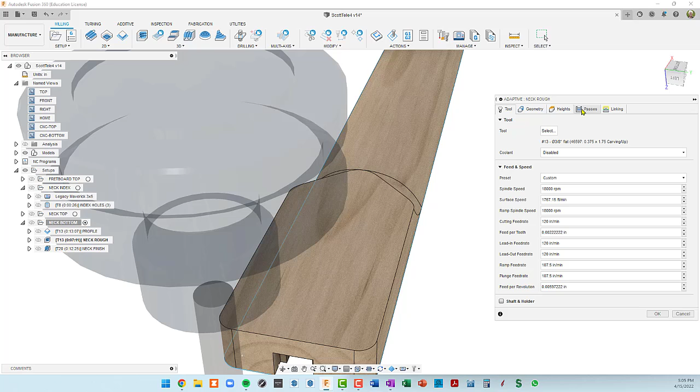Geometry here, I have tool on center of boundary. If I hover over that, you can see what that means. That's going to allow the center of the tool to be aligned with this boundary. Between that and our extra 1/4 inch of additional offset, that allowed us to get the full roughing done. Let's take a look at our heights.

Our heights are pretty standard. We went from stock top to model bottom. Now we are going to go into our finish pass.

This is a tool change, a 3/8 inch ball end mill, or ball nose mill. Our geometry, this is a parallel tool path. I've got nothing selected in geometry, so basically it will finish the entire neck, except there's two faces here to avoid.

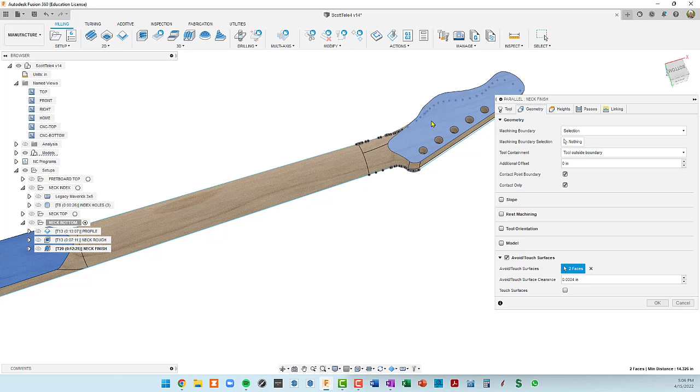So I went into avoid touch surfaces, make sure this is not checked. That would tell it to touch these surfaces, but we want to avoid those. So I just selected this face and this face because these were pre-finished in our stock.

Our heights - let's see, our bottom height, not sure why that's set an extra 1/8 inch low in the finish. Oh, I guess that allows the ball nose bit to come down and really finish the edge. Yeah, it does. So let's see.

If this was set to what you would think it would be, zero, we're going to see a finishing problem here.

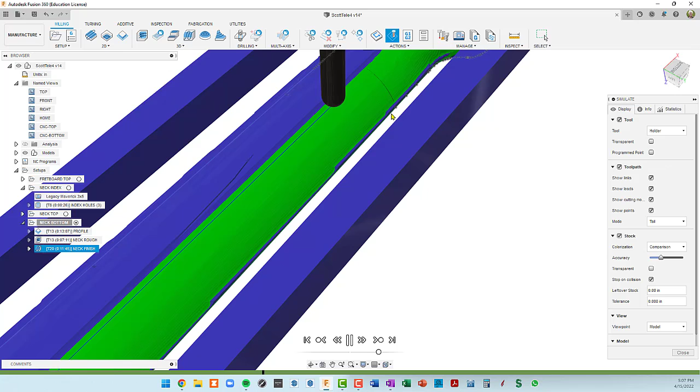Okay, so our roughing toolpath is done. Let's simulate the finish toolpath. And you can see, if we zoom in here, you see some blue areas. So the ball nose bit didn't want to go down beyond the bottom of the model because of what we selected for our heights in our heights tab.

So let me stop this, go back into our heights tab, and this was set to - I don't remember what it was set to. I think it was -1/8 of an inch, -0.125. Okay, so now if we simulate this,

you can see we're getting all green here. And if we look at it from the side view, right here, let's rewind this. We should be able to see that ball nose bit come through the stock right there. See, it's coming through the stock.

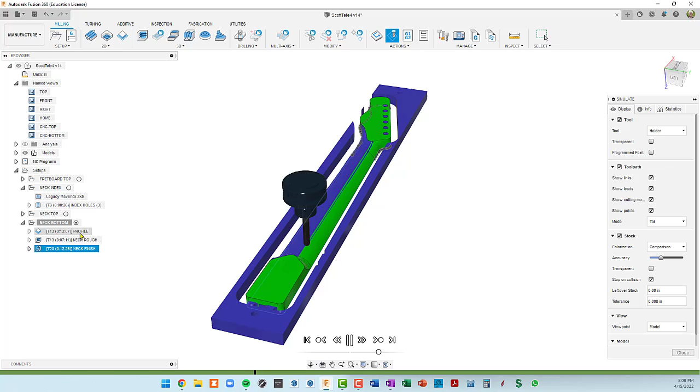And so that's why we cut into the MDF fixture an extra 1/8 inch when we did our profile, so that the ball nose wouldn't collide with the MDF fixture.

Okay, so I think what we're going to do now is just run our top and bottom tool paths together and make sure that everything in the model is green. Let's take a look at this side. This all looks good, so I'm going to close this.

I'll collapse down this setup and this one, and I'm going to shift click here so we have our top and bottom setups selected. Let me activate the top one. So that got us to this top view.

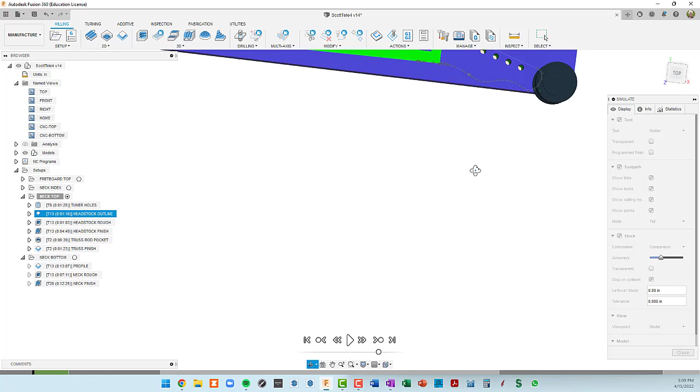I'm going to simulate, and instead of letting this thing run, I'm just going to go to the next operation, which will show you. Let's open these guys up. So it's on tuner holes right now. If I go to next operation, boom, all the tuner holes are done, and you can see that the holes are actually cut.

So if we go to the next operation, this is the headstock roughing - no, this is the headstock outline. This is the outline that we wanted to do before the roughing. This is the roughing, including the transitional rough here.

Next operation is our truss rod pocket - no, I'm sorry, the next operation was the headstock finish. So headstock got finished off. Now we're about to do the truss rod. Then now we're going to do the truss rod finish, which is the overcut of the truss rod.

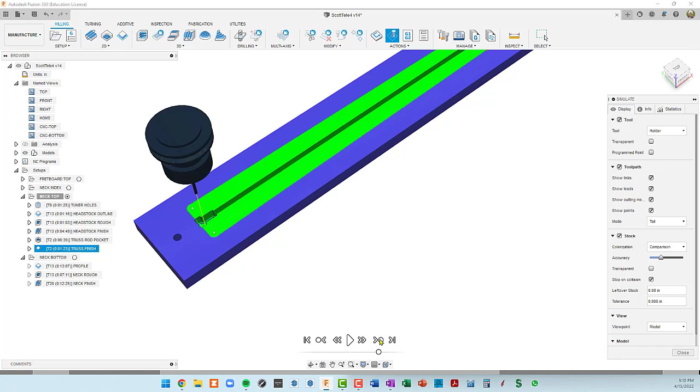Now we're going to do one of the bottom guys. Let's see, is it going here? No, all right, I must have done something wrong there - I guess I didn't select both of these. Okay, so I'll do it really fast.

So tuner holes, boom. Headstock outline, done. Headstock roughing, done. Headstock finish operation, done. And then our first truss rod, our second truss rod is done.

Now we're about to - you see how the tool is on the other side, I just spun this thing around. We're about to do the profile. So profile is cut, our tabs are in there.

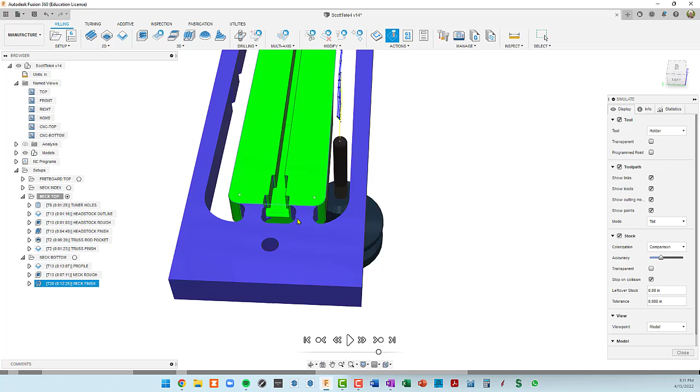Next operation is our neck roughing, and the final operation is our neck finishing. So now at this point, if we orbit around here, we should see green everywhere except for our tabs. And that looks like the case.

This is a sketch here that I should have turned off earlier. If I go into the model, let's see, open up the model - and here we do have sketches turned on. Okay.

All right, so that is our completed CAM of the neck.